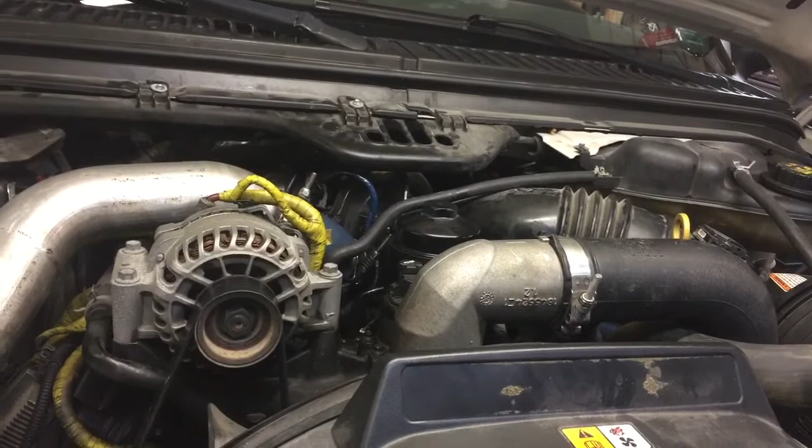Worried that whoever tried to clear it swapped out the low pressure switch, and I think he stripped the port for the switch. So we're not going to try to tap it. Once we get it apart, we'll go ahead and put a new adapter plate on top of the oil cooler, just redo the whole plate, and that'll handle it.

But we're going to go ahead and fire it up and do a diag right now because it's not pumping oil. It was all good to just yank it out and find the failure, but I wanted to go ahead and start it. I want to see how it warms up, see how it runs, the injectors.

Let's start it a little bit. Hang on a second, let me get the remote start wire, get everything hooked back up. Probably might need the battery charger on it, who knows, but let me get the computer set up.

We'll be right back. Okay, this is an '06, 144,000 miles.

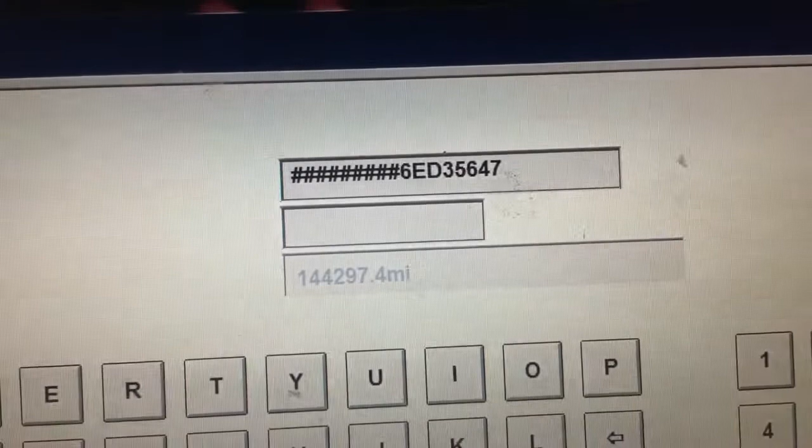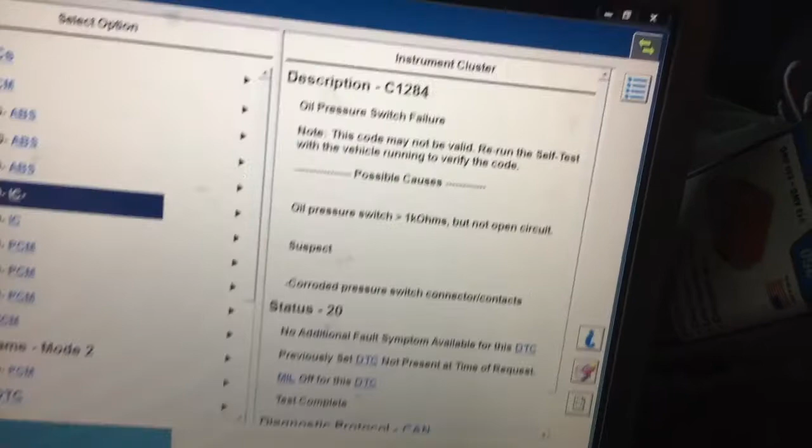Okay, here's some codes we got. We got left rear, which that's possibly the pigtail or the actual rear speed sensor. Oil pressure switch failure, which is oil pressure out of range.

Great, hope that... man, this thing might need a freaking engine harness. We might want to just be done with it.

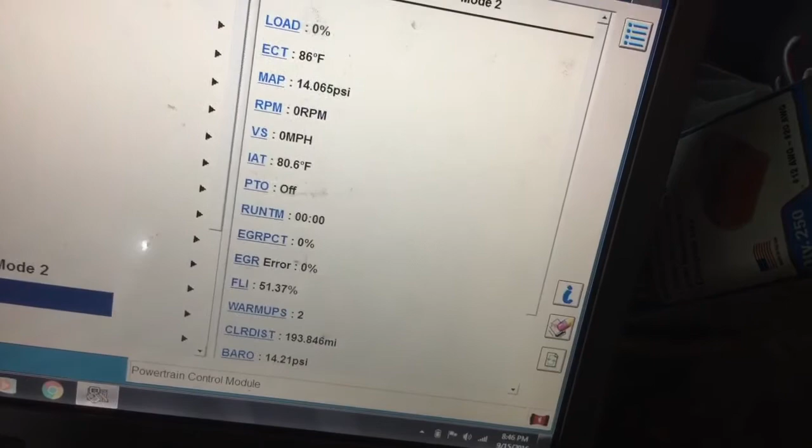Alright, what we're going to do is, I don't have any ICP low codes, so I figured we'd have ICP low because we didn't get low pressure oil.

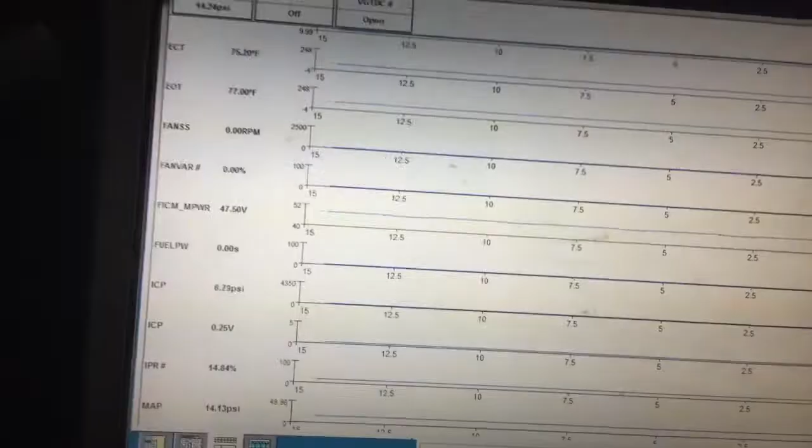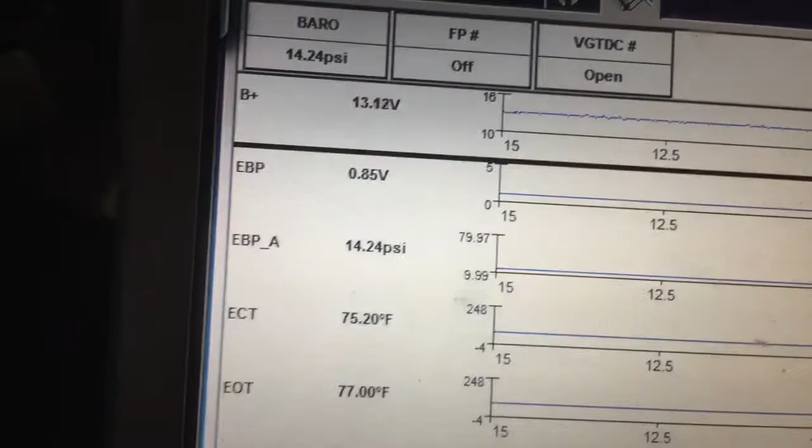Hang on just a second. Alright, here we go. I got the battery charger hooked up to it, so it's showing 13 volts. EBP volts is a hair low, pressure might be low right now. Normally I like to see 0.87, 0.88, but it's all good. FICM looking alright, I mean, you know.

So what we're going to do is we're going to check that ICP. First thing we got to do is pump up the low pressure oil. I think I'm going to go ahead and kick it off, kick it back on again. Let it connect.

And check the FICM here, and we get it to fire. Now it was straight up no start, so we're going to kind of do this all together here. Getting ready to fire it, and I'll go straight to the injectors too once we do fire it, if it starts. But it's going to take a minute because we ain't got no oil. Here we go. Sounds like it's popping out of the intake.

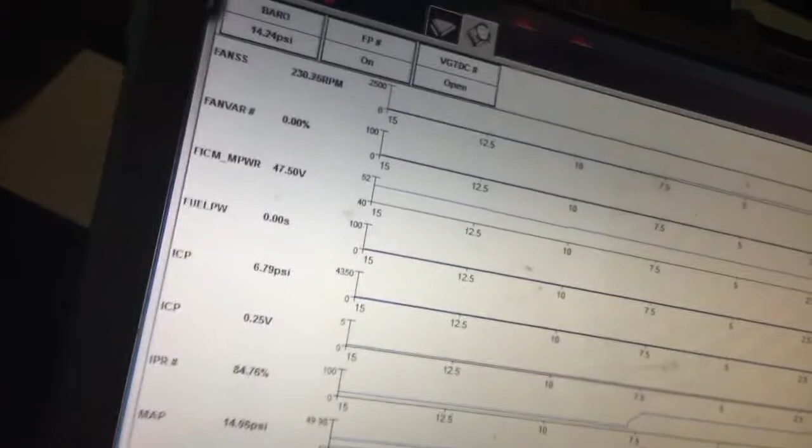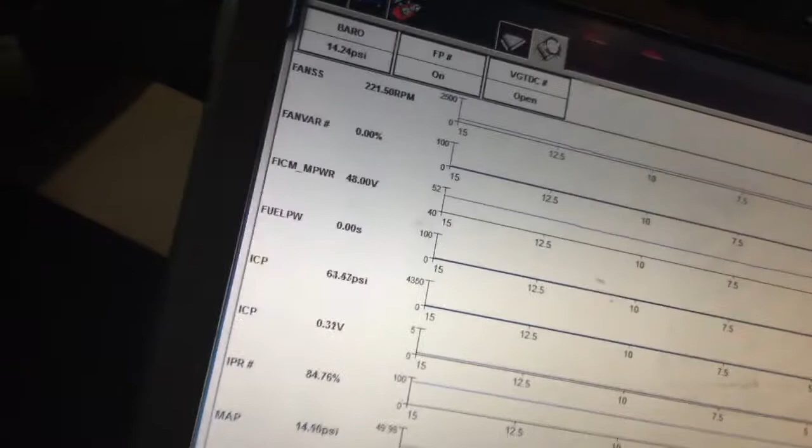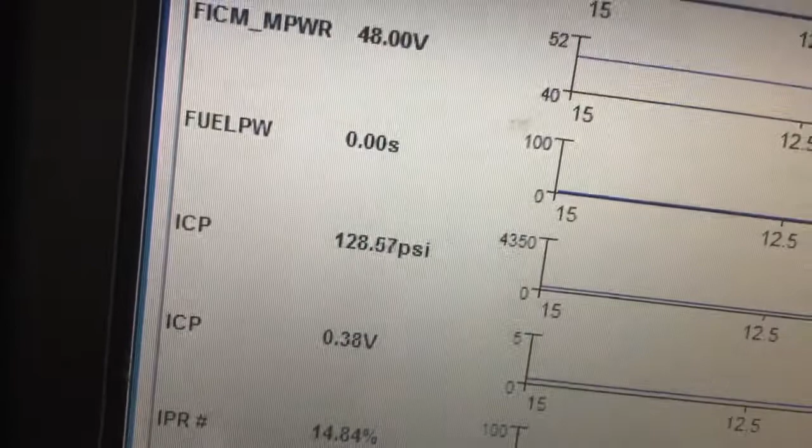Yeah, I could hear the tone change when we got oil pressure. Hang on just a second, let me have her check and see if it's leaking. I don't know if the low pressure switch is leaking or not. Hang on, you can see we don't have a high pressure oil issue. Well, it's dropping down, but it's got air in it. Holding 120 pounds.

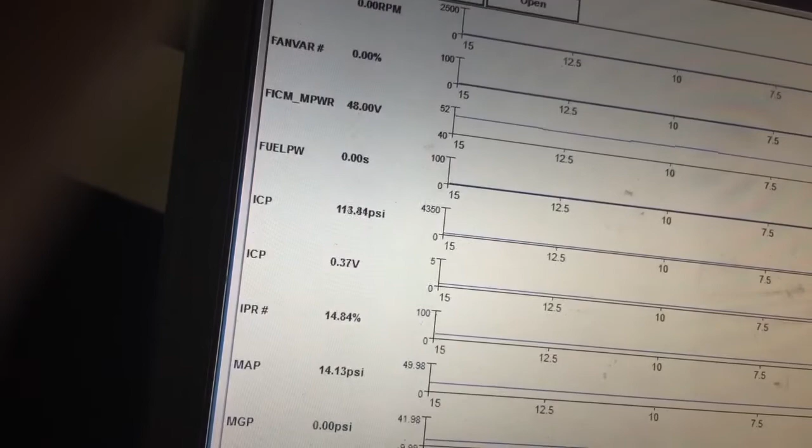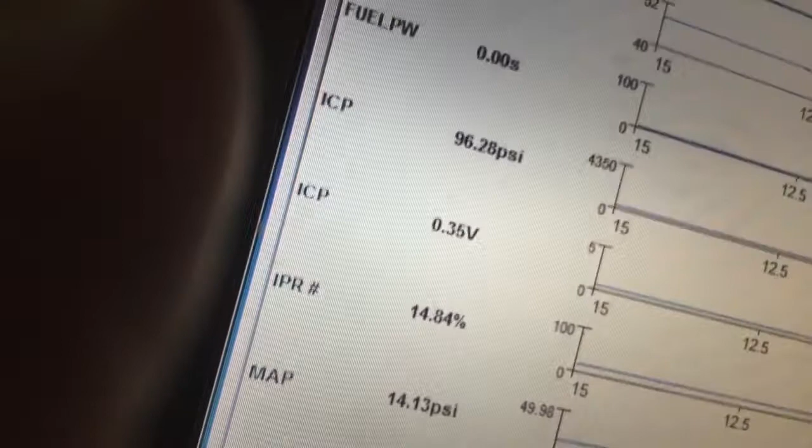We're getting ready to, here we go, let's do it again, it's gonna fire here. Let's go. All right, we might get a light, watch it. Hang on, let's wait a minute. All right, here we go. We might be cutting it off if the oil pressure switch is leaking because it's not threaded in very good. Here we go. Whoa, I cut off a little early.

Whoa, injectors sound good. All right, it's pumping oil right now, so.

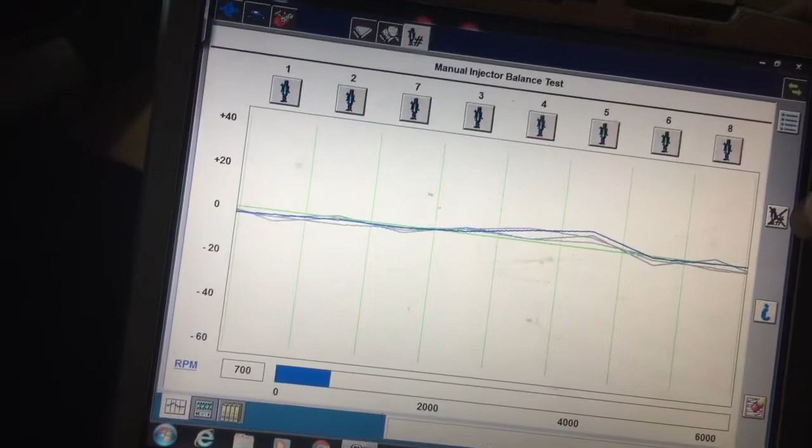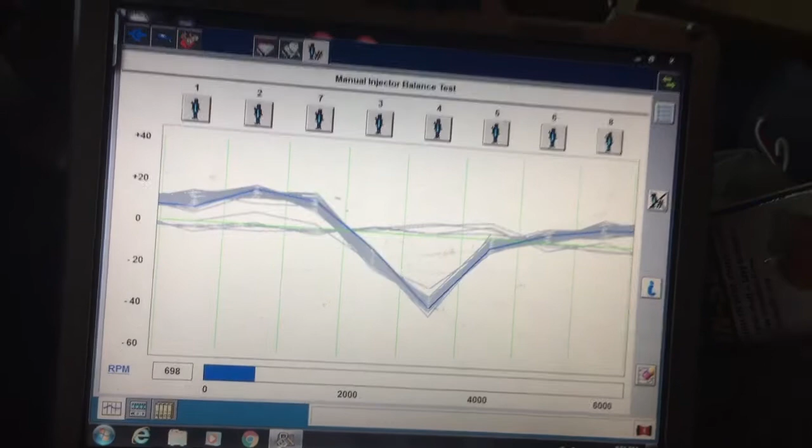How bad? Okay, number 4. At least number 4, it's really taxing number 3. We're leaking oil like son of a gun out of the oil pressure switch. So we got number 4, that's really the main one that looks bad. You kind of see one dropping over here, but everything is compensating for number 4.

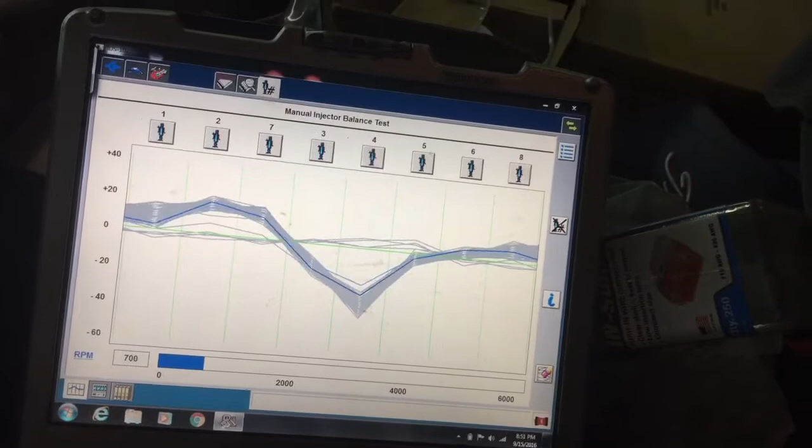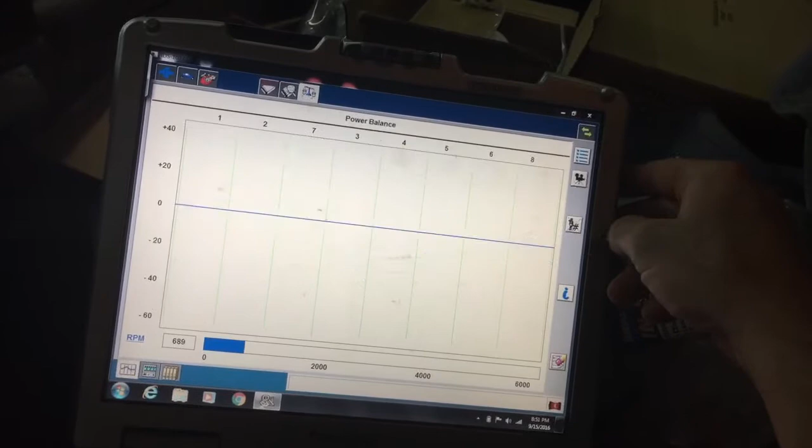So bare minimum, we might have saved ourselves injector labor. I'd probably say 3 and 4, get both of them out of there. Yeah, I guess we're leaking oil. I don't know how bad, but let me check that. Oh, there goes 3, you see it dropping?

Put a drain pan under it? Alright, hang on, okay, here we go again. Let me close out of here. Here we go. Good.

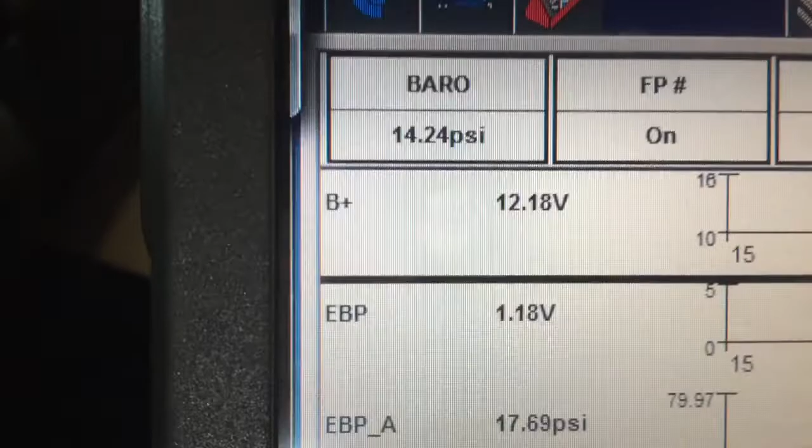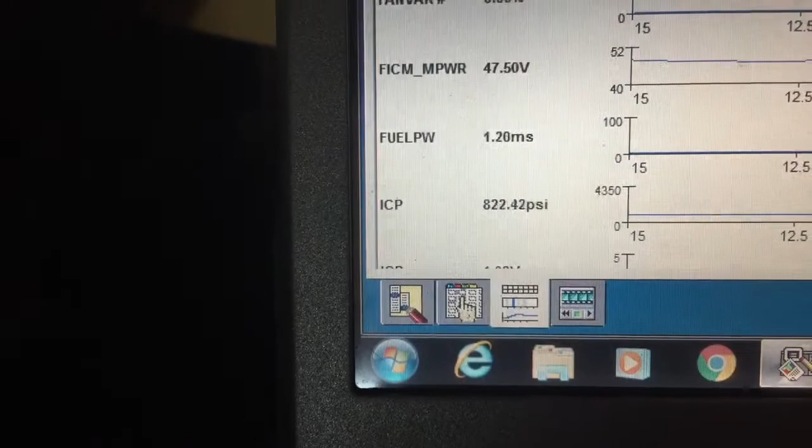It's running fairly smooth.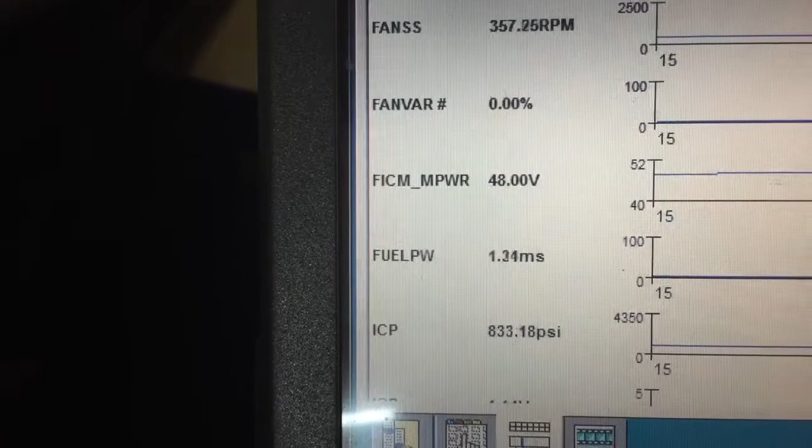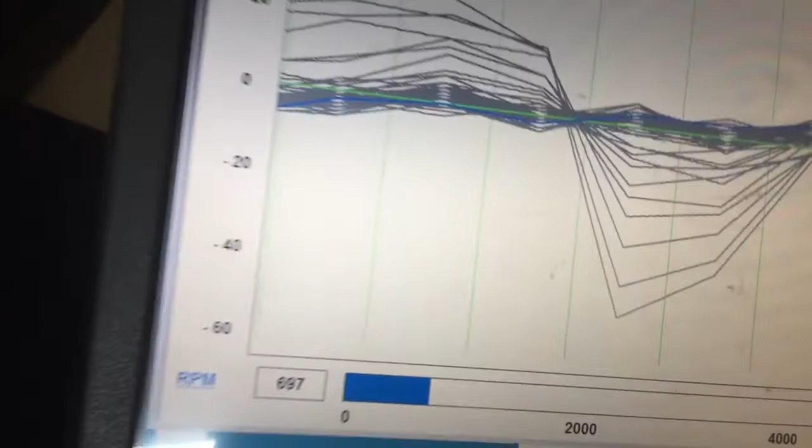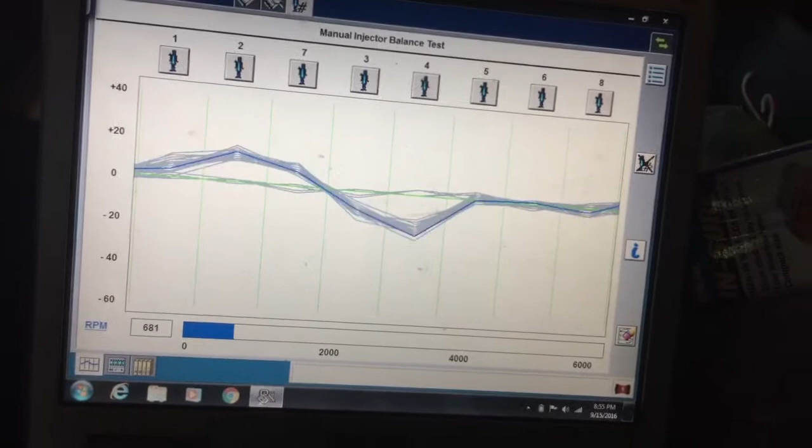Compensation shut off, definitely 3 and 4. Watching for any other ones to drop.

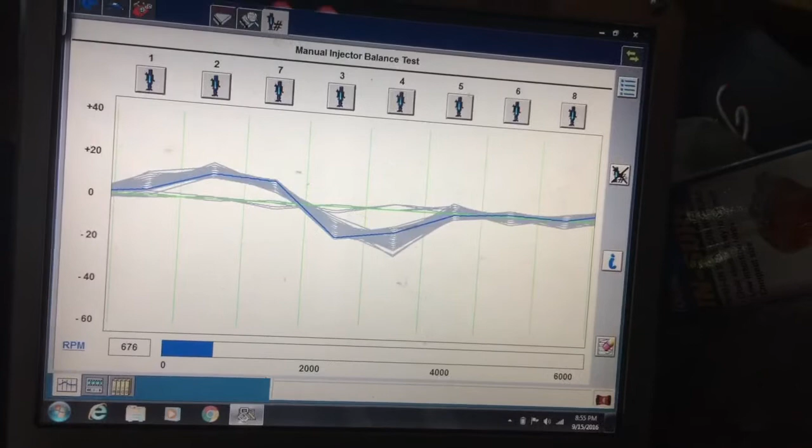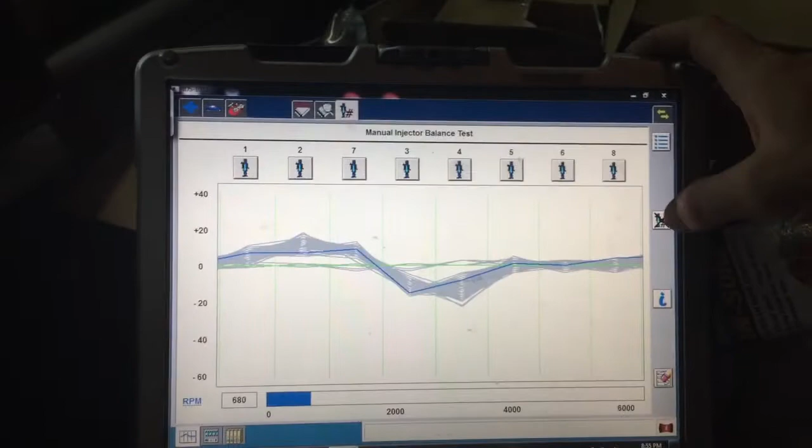We'll go ahead and smooth it out and let's go under the hood. Hang on, it actually isn't sounding too bad. Pop this, thought I heard a lot of popping going on. Let's find out. No? No, it sounds alright.

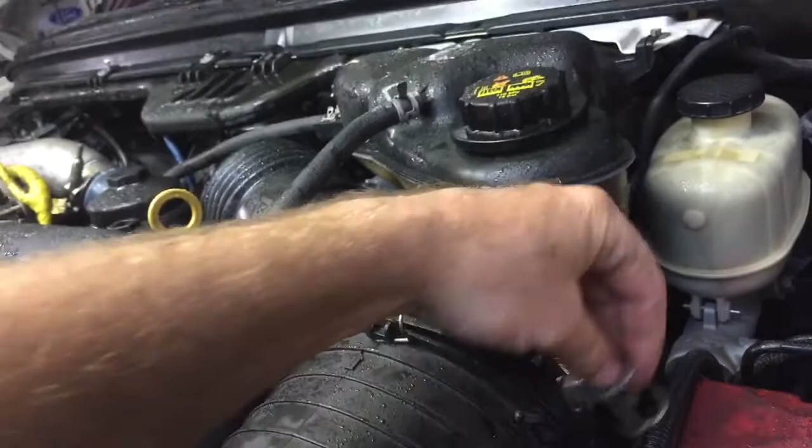Well, we might have some more life out of this thing. Who knows the head gasket? I don't know. We're just making sure it's going to continue to pump oil right now, as I was worried about.

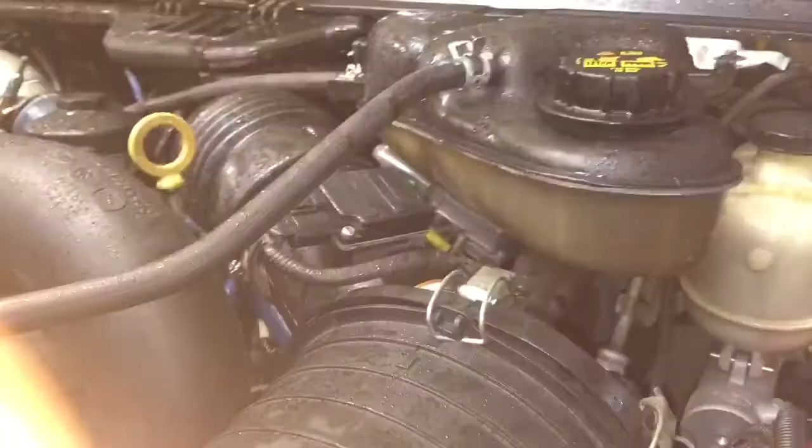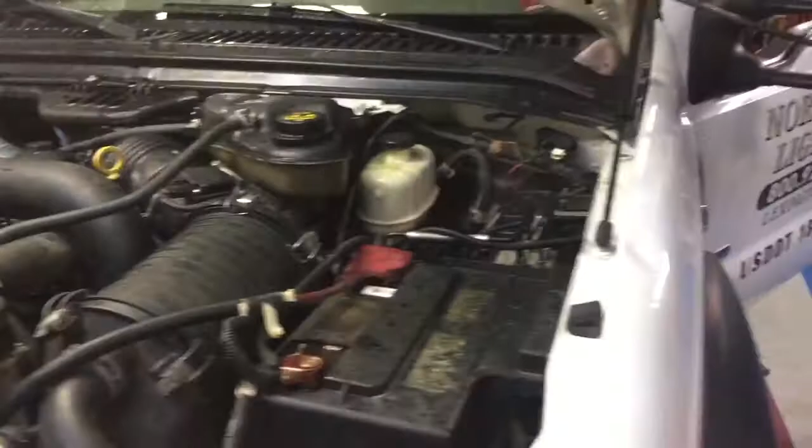It's leaking, I mean it's not leaking that bad, it's still leaking though. We got the oil pressure switch not even hooked up, so yeah, we're not showing any oil pressure.

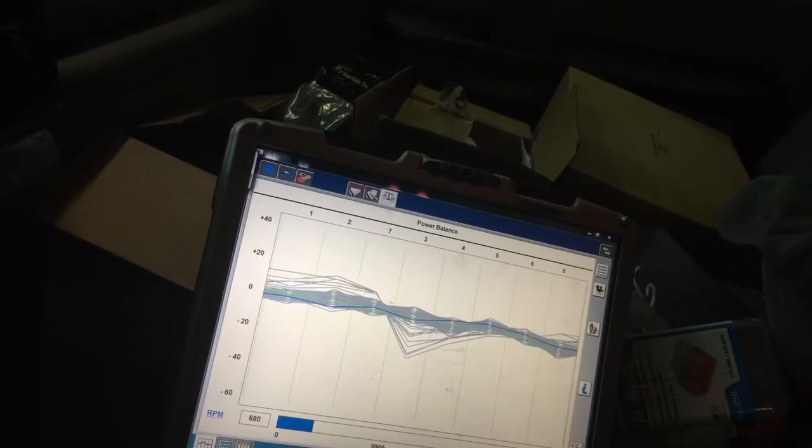ABS light would be the rear speed sensor. I mean it's like pick one, the sensor or the pigtail, it's one or the other. Sometimes low voltage will do that too, but...

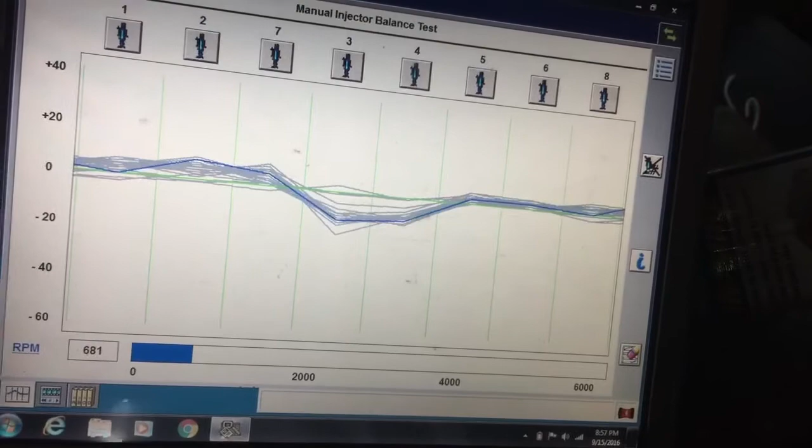3 and 4 are not clearing up. They're doing alright now with it. It's pretty warm, you get this thing in the wintertime and number 3 and 4 are going to be, yeah, they're not going to survive.

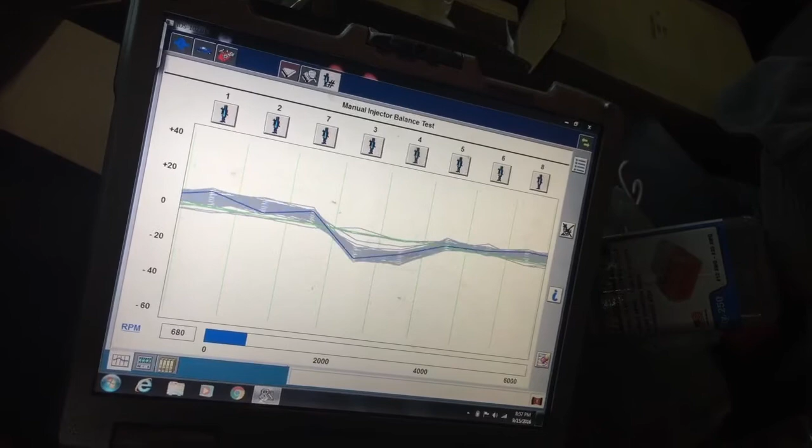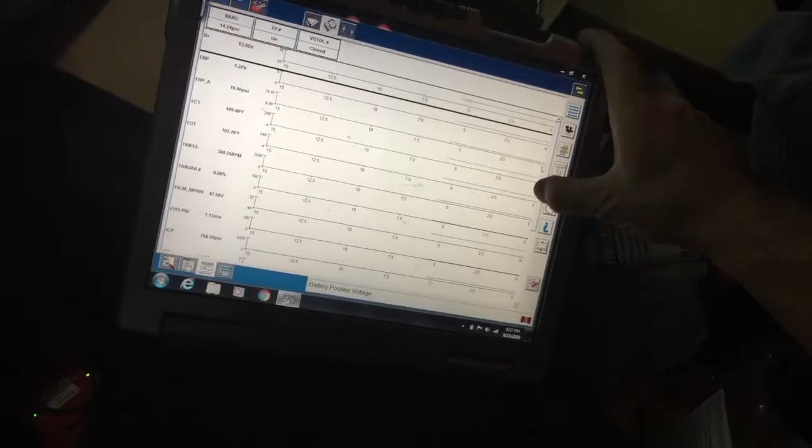Be nice, maybe we'll, if this thing continues to run, we'll do a fuel pressure test too. I just don't like breaking them down when I know I can get it to start. I don't like to go ahead and tear the whole freaking thing apart.

Wow, look at the boost, turned all the way up. 84%, man, we should be seeing like 7 pounds.

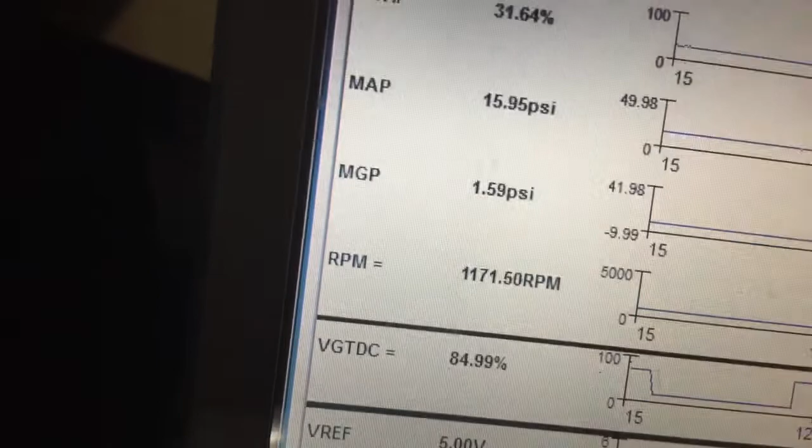Let's see, hang on, let's see what we got here. There we go, that's more like it. Watch the gauge pressure. It's a little low.

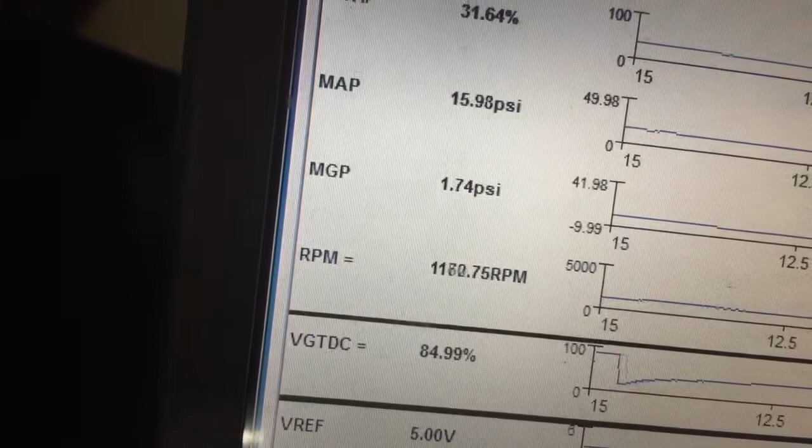I'm just going to do it a couple times. I don't have the EGR commanded closed, so that's going to cause it to be a little low.

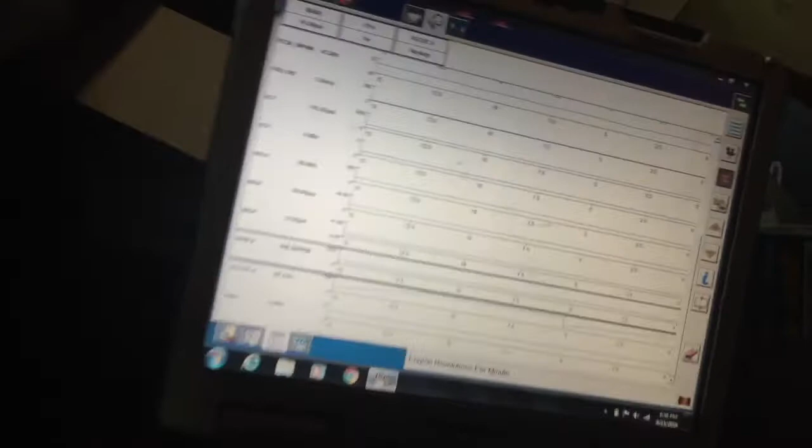Let's go ahead and, yeah, let's running. Doesn't sound that bad.

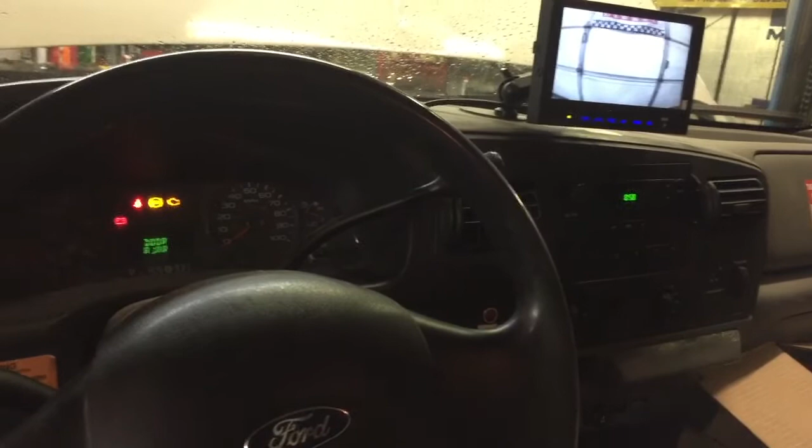Oh no, hang on, alright I just blew it out. What a drag. Hey well, I'll see you. I'm gonna plug it, gonna plug it with something. I don't really give a damn what we plug it with. I don't need the oil pressure reading right now. We know we're going to go in and replace the entire housing, so we'll just, yeah, hang on.

Well, I don't know, I got the injectors down. Maybe I'll make another video here in a minute, or Julie's probably going to want to go home. I just covered her with oil. Whoops, alright yeah, go ahead and end it.

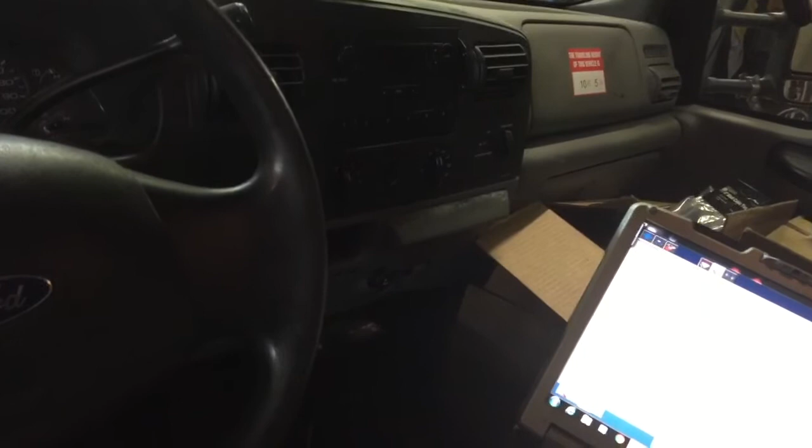We fired it up, it's running. High pressure pump was not as bad as I thought I would see. Might have just been a regulator, but honestly, it's not very common that the regulator sticks, it really ain't. But there was a couple of spots on the oil pump, but by no means was it shut off bad. So I don't know, we'll go ahead and end this, and I'll probably make another video later.